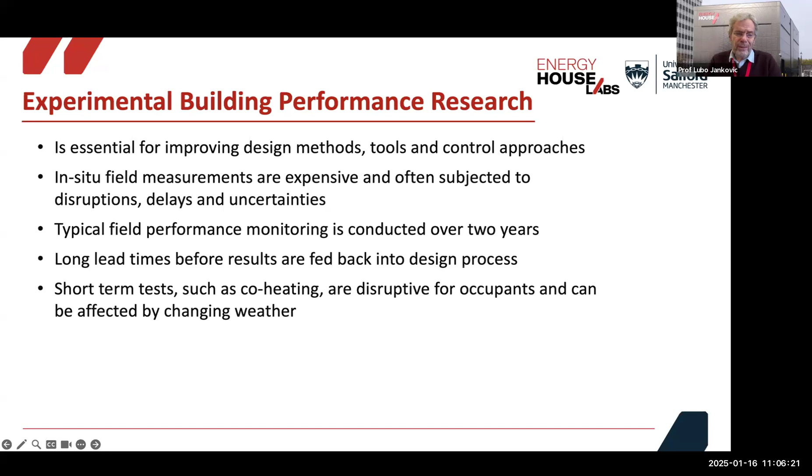In situ field measurements are expensive and often subjected to disruptions, delays, and uncertainties. Typical field performance monitoring is conducted over two years, and this represents a long lead time before results are fed back into the design process. Short-term tests, such as co-heating, are disruptive for occupants and can be affected by changing weather.

Before my tenure at Energy House Labs, I lost count of how many buildings I monitored, probably over 100 buildings as part of field trials. But one project in particular that I'm showing here involved 20 houses in Swindon and 20 houses in Norfolk, and there were various complexities of fabric and systems issues and interactions with the occupants.

For example, air tightness was far worse than design. Heat pumps were not installed correctly and were producing suboptimal results, and people didn't know how to operate them.

In terms of other issues with occupants, we had an occupant switching off a mechanical ventilation with heat recovery system without us knowing about it. There were occupants who didn't know how to switch the heat pumps off. But in one case, an occupant managed to switch off our weather station that happened to be in his garden. So all of this required frequent site visits.

And it is expensive, especially if you think that these sites are probably maybe about 4 hours drive apart, and then a third site is where I live.

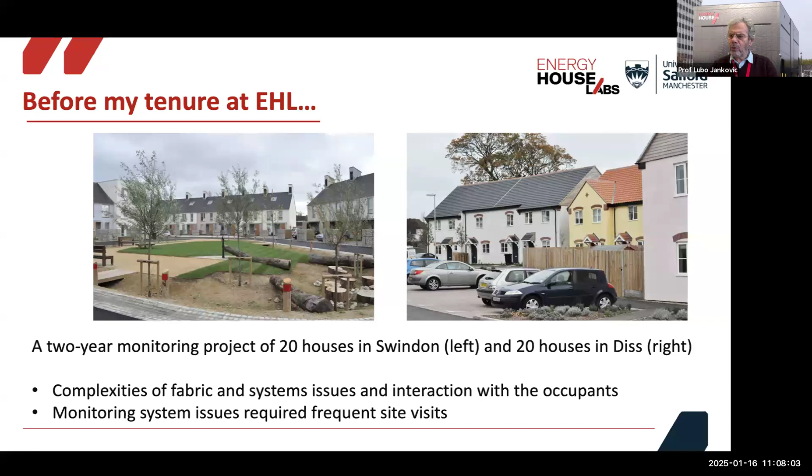In terms of short-term monitoring, such as co-heating tests, these require stable weather over a week or more. I did a co-heating test in this particular house at the BRE site, and this building was given to me to work with in March of that particular year. This co-heating test was likely to be disrupted by sunny weather, and I had to install reflective foil as a precaution to prevent excessive heat gains into the building.

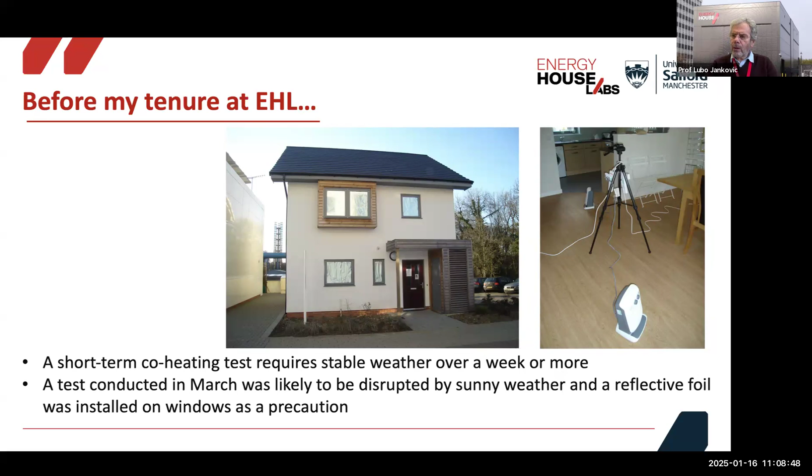So therefore, we need to do something better than field trials, and we are in a race against time to understand and mitigate the effects of global warming.

According to Copernicus Global Climate Highlights, the average global temperature in 2024 was 1.6 degrees Celsius above the pre-industrial level. This is almost breaking news as of a few days ago. And this has breached the Paris Agreement threshold of 1.5 degrees Celsius. And in 2022, the Met Office recorded a new record temperature of 40.3 degrees Celsius in Lincolnshire.

So an accelerated approach towards building performance research is needed to achieve net zero targets by 2050. And such a new approach has been developed at the University of Salford Energy House Labs.

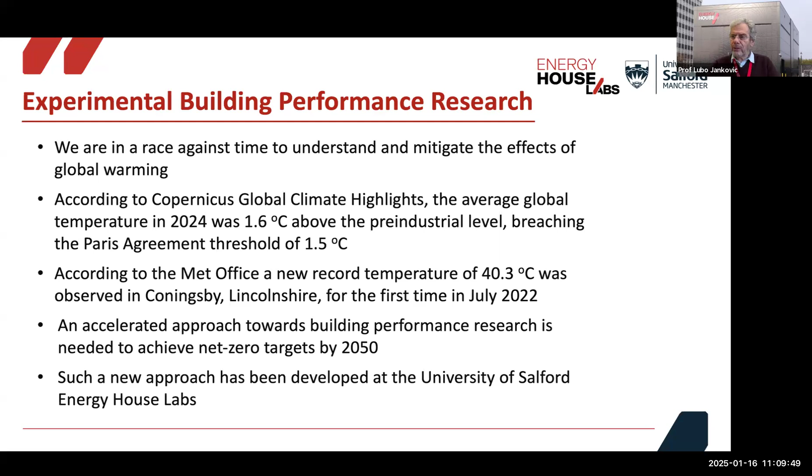So what are Energy House Labs? We have 4 labs plus another one potentially emerging. We have Energy House, which opened in 2012, and then Energy House 2, which opened in 2023, and then Thermal Measurement Laboratory and Smart Meters, Smart Homes Laboratory. And we are just about to establish a modeling lab that actually takes data from all these other labs and generalizes it, scales it up, and adds value to the data.

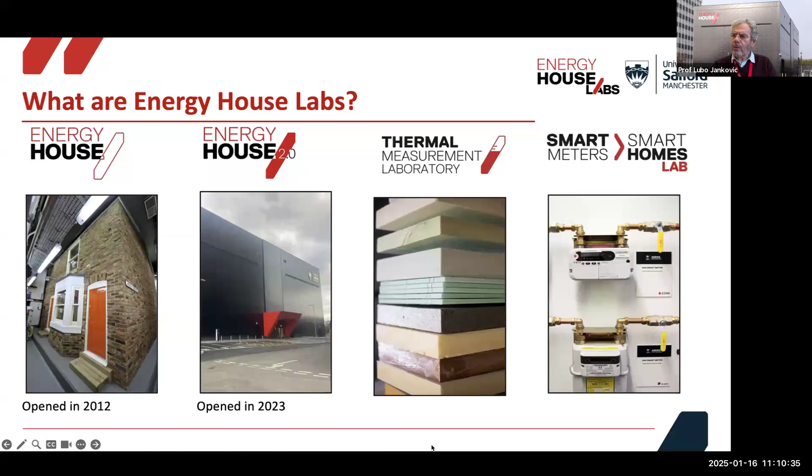Okay, so what is Energy House? According to Climate Change Act of 2008, UK carbon account for the year 2050 has to be at least 100% lower than the 1990 baseline. And existing homes will still be standing, 70% of these will still be standing in 2050.

And retrofit solutions are difficult to assess. Field trials are difficult and expensive, and we need to be able to repeat experiments. And we need to have the ability to change the building, even to build in defects and take more risks.

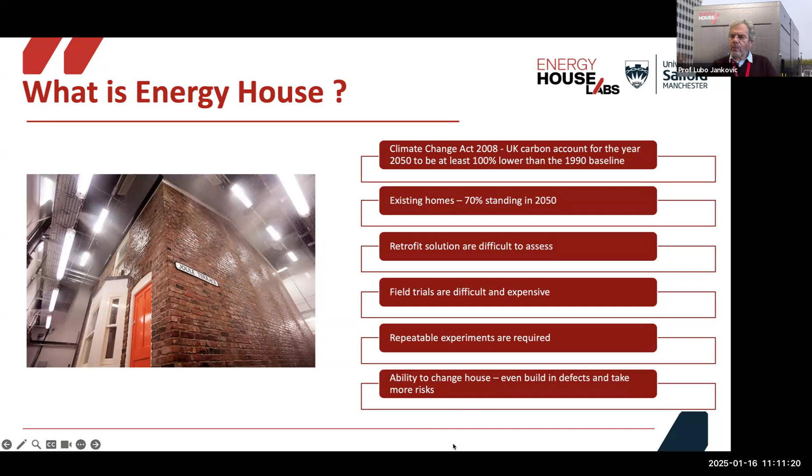So Energy House is a fully furnished, fully instrumented house within a climate chamber. And it is a semi-detached house in a controlled environment. It has high data quality with more than 300 data points, not just to evaluate performance, but the underlying reasons for the performance.

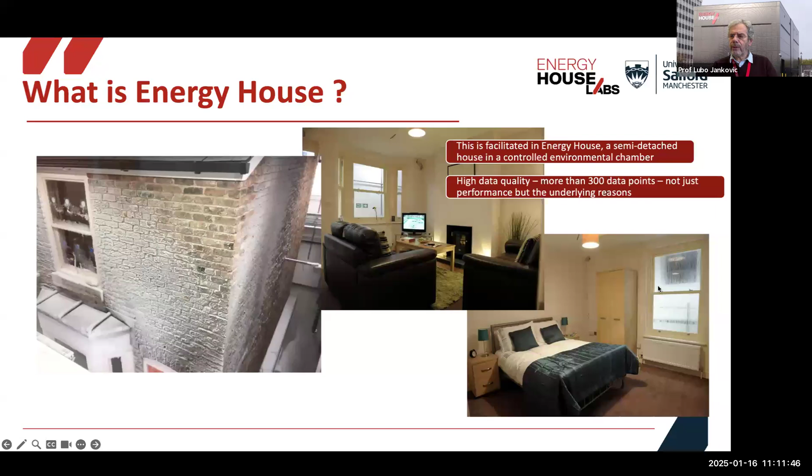And the environmental chamber and the house are summarized here. There are 3 heating systems in Energy House. There's gas, there's air source heat pump and electric heating. Then there's obviously hot water heating.

It's fully furnished. There are appliances there, and it's fully automated. So the doors, windows, bath, shower, lights, and heating are fully automated.

And it is constructed using methods found between 1900 and 1910 in the UK with reclaimed materials, and it is a solid wall construction.

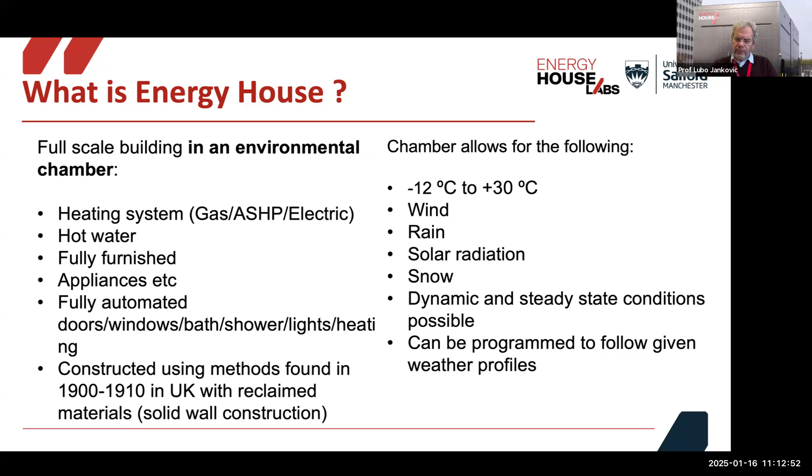The chamber allows for -12 degrees to +30 degrees external temperature, and then there are wind and rain and solar radiation simulations and snow. We can produce dynamic and steady state conditions, and these can be programmed to follow given weather patterns.

So in Energy House, we can conduct full retrofit. We can conduct full retrofit without floor insulation. We can do just solid wall insulation. We can investigate performance of different glazing types, change the loft insulation. We can do acoustic tests, or we can just use it as a reference case.

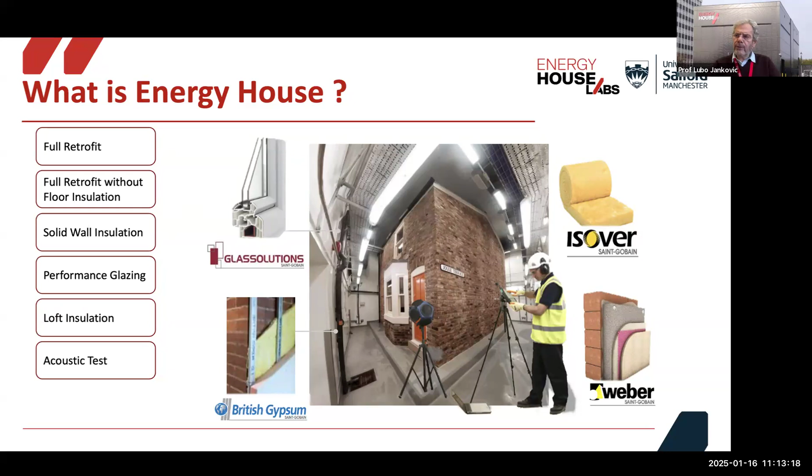Now, I'll give you a few examples of research results achieved over the past 7 years. A small one of 0.6% saving if the central heating boiler is controlled to manage the start time and ramp times of heating, and chopping sections of heating. And if we remove air dissolved in the central heating system, that contributes to a saving of 0.5%.

But if we add a time proportional and integral thermostat, that provides savings of 32%. If that thermostat is integrated with thermostatic radiator valves, that leads to a saving of 53.5%. A voltage optimization system was introduced to change the voltage down to 220 volts, and that improved performance between 3.3 and 3.9%.

Water-filled electric heaters were also tested against gas central heating. Savings are generated because there are no boiler heat losses, no losses to floors through distribution, and there was quicker heating and cooling, with no lag times. The saving was 23.4% annually.

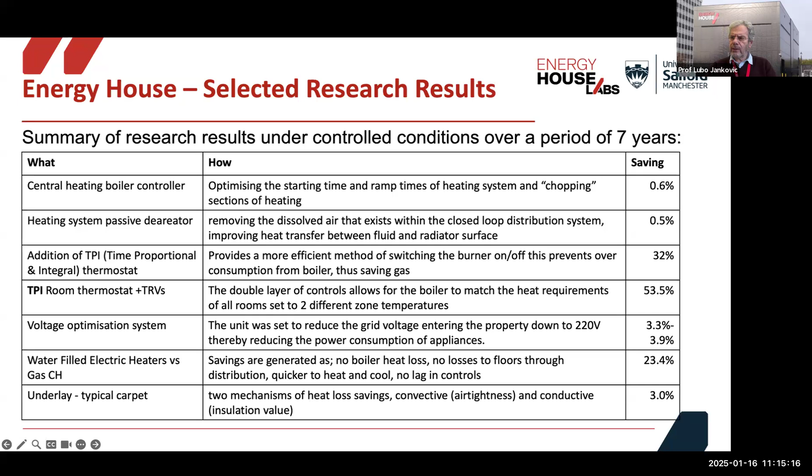And then underlay, typical carpet, saved around 3% of energy. Then installation of a window film on single glazing effectively created double glazing, which improved energy saving by 2.8%. Curtains, when used at night, saved 2.2%.

Suspended timber floor insulation, 7%. Hybrid wall insulation, so external wall insulation was installed to gable and rear walls, and internal wall insulation to the front elevation, the main facade, so that the main facade was kept untouched.

And that created savings of 45%. Loft insulation top-up from 100 to 270 millimeters, 3.8% saving. Window replacement to A triple plus generated 7% of savings, and full fabric retrofit 63%.

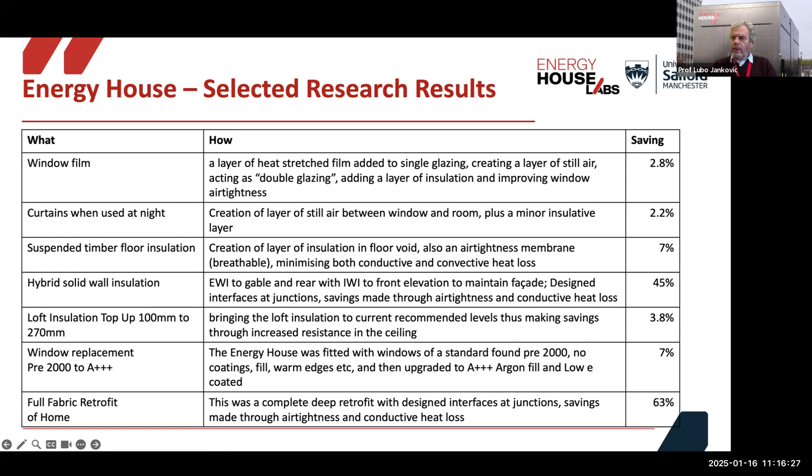Okay, so Energy House is therefore very useful to evaluate all these different performance issues.

We can push it and poke it and see what happens, but this is a fixed asset reflecting 20% of UK housing, with a limited weather profile of between -12 to +30 degrees Celsius. Waiting time in Energy House to do new experiments can sometimes be more than a year, and we've had approaches from other universities. Therefore, Energy House 2 was created as a new facility to retain leadership in this approach.

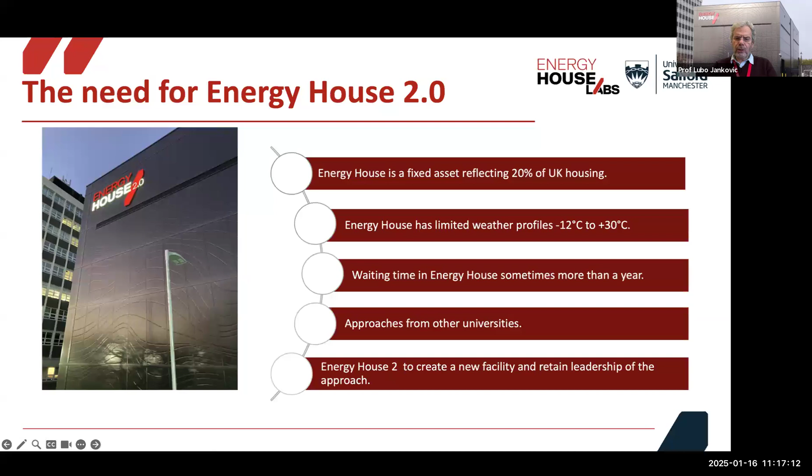Energy House 2 opened in 2023. It has two large climate chambers which can maintain temperatures between -20 to +40 degrees, representing 95% of the populated areas on Earth. There are wind, rain, solar radiation and snow additions - we have a proper alpine grade snow machine, and dynamic and steady state conditions can be programmed. We have vehicle access for bidirectional charging to homes, with PV, ground source heat pump, air source heat pump and hydrogen supplies. We're working with partners in acoustics and social science.

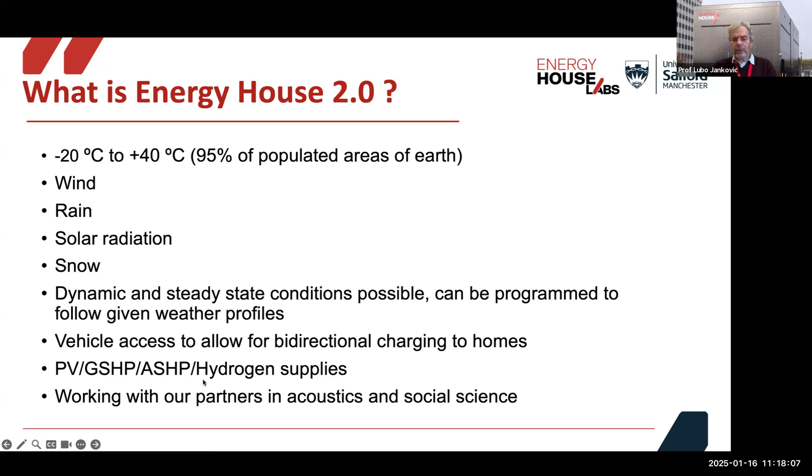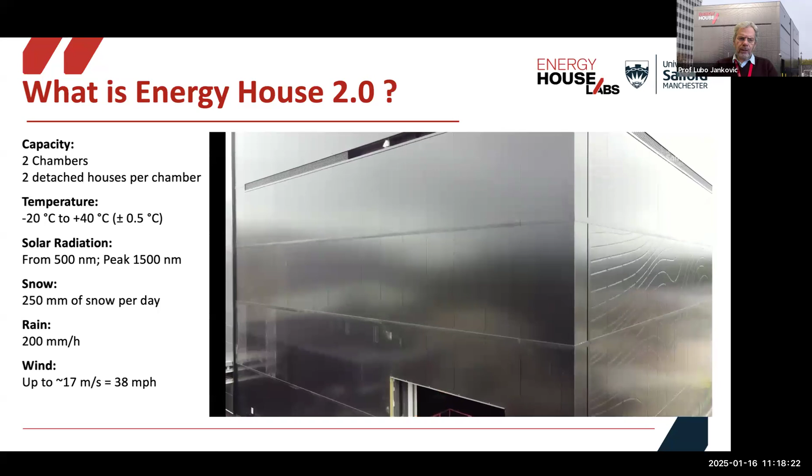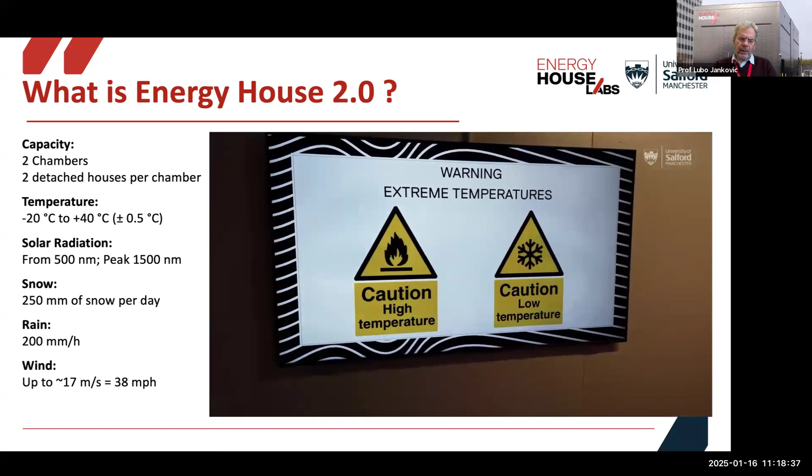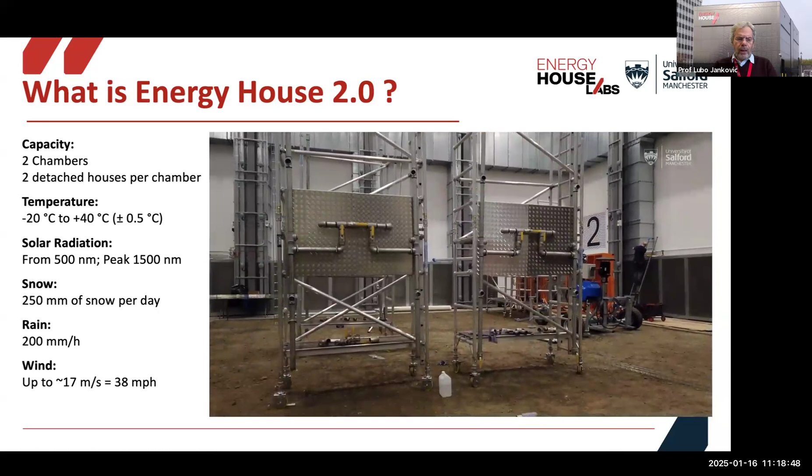I'll run this video to show you how it was developed. There are two chambers, two detached houses can be constructed per chamber, with temperatures of -20 to +40 degrees. Solar radiation starts from 500 nanometers and peaks at 1500 nanometers. We can produce 250 millimeters of snow per day, rain at 200 millimeters per hour, and wind up to 17 meters per second, around 38 miles per hour.

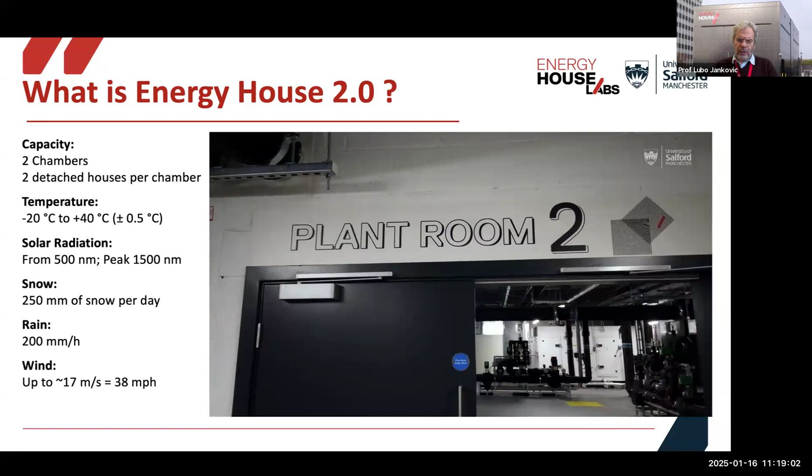These are large plants that service Energy House 2 - heating, ventilating, air conditioning, and cooling plants.

Energy House 2 was constructed, as I said, in 2023.

Now the chambers each contain 1200 millimeters deep soil. There's a pit under each climate chamber, 1200 millimeters deep, filled with soil, isolated by thermal insulation from the ground beneath and surrounding the pit. The walls and ceilings of the chamber are well insulated, providing isolation from the external climate with high levels of air tightness. Both chambers are independently conditioned by large heating, ventilation, and air conditioning systems.

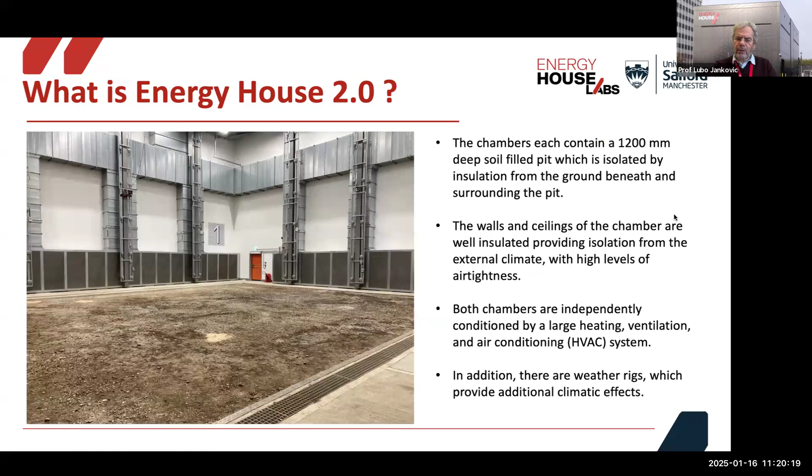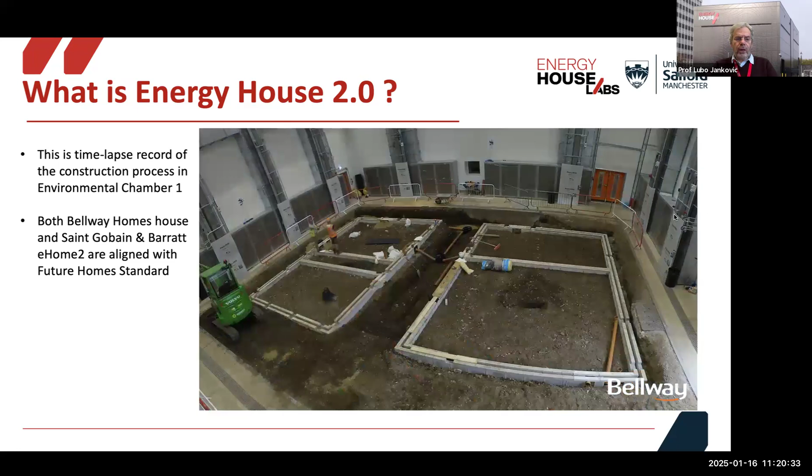In addition, there are weather rigs which provide additional climatic effects. This is the time-lapse record of the construction process in environmental chamber 1, where both the Bellway Homes House and the Saint-Gobain Barratt eHome2 house are constructed, aligned with the Future Homes standard.

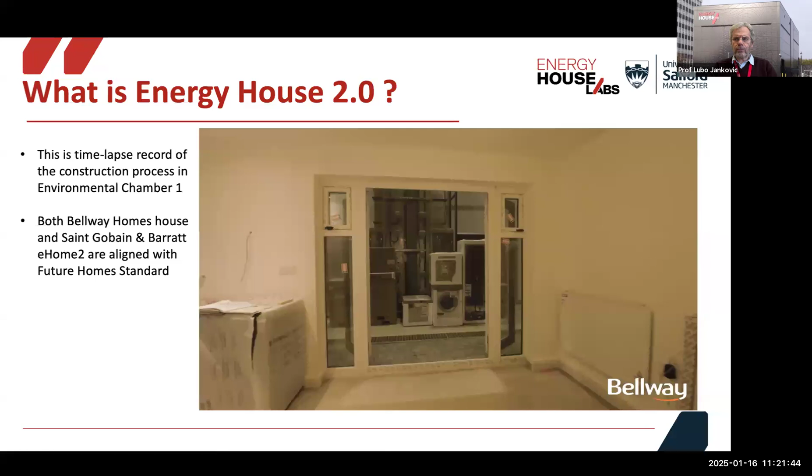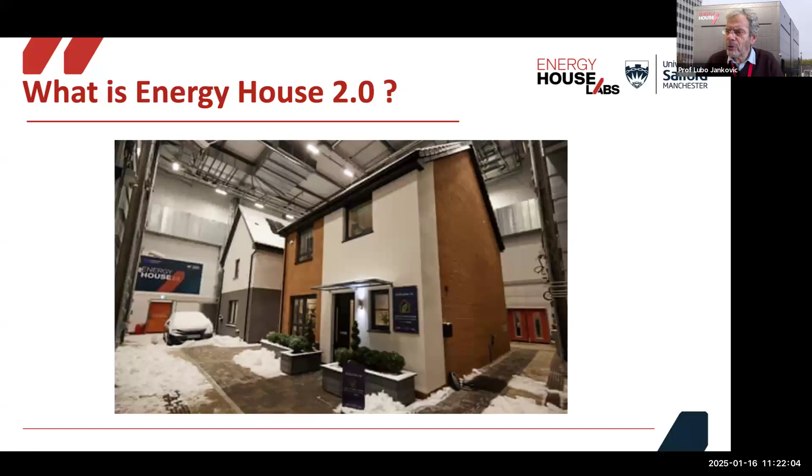Here is a photo of environmental chamber 1 under snow with a car inside. This gives you an example of what is possible to simulate.

Future Home Standard will happen this year, in 2025. It involves a 75% carbon savings reduction compared to 2013. Houses will be zero carbon ready, with efficient, more airtight fabric, and lower running costs. They will have solar PV, batteries, EV chargers, and air source heat pumps. There will be no gas heating.

Energy House 2 has two real homes - the Saint-Gobain Barratt eHome2 and the Bellway Homes House - which are very similar to the Future Homes standard. So these are the houses of the future, effectively.

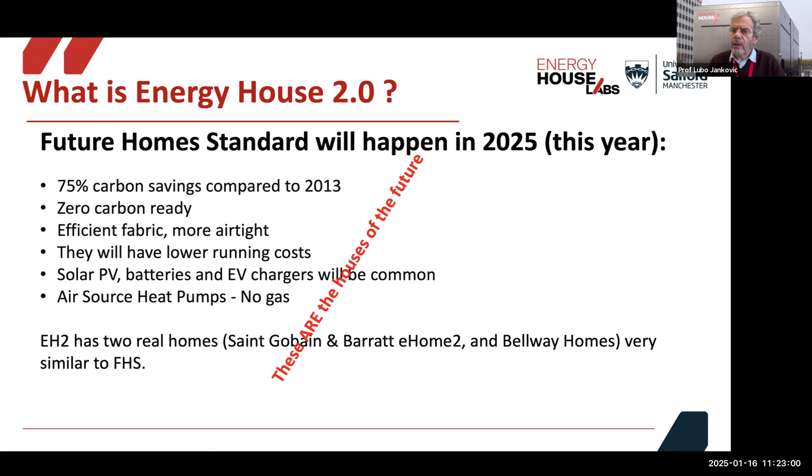The Future Home Bellway has a timber frame construction with infrared panels in the ceilings. There's a PV inverter and a battery in the loft, mechanical extract ventilation, a hydro-top air source heat pump, and mechanical ventilation with heat recovery. There's a wastewater heat recovery system based on a Mira HeatCapture integrated tray, which is 34 to 40% efficient, and a Mira HeatCapture vertical pipe system, which is 58 to 64% efficient.

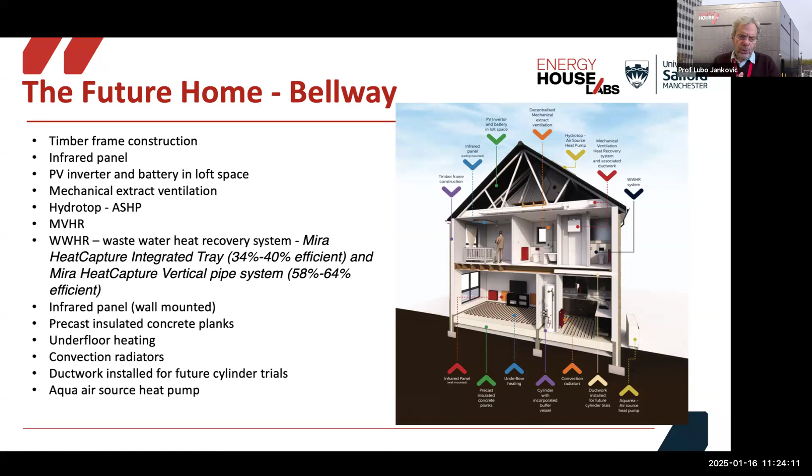There are infrared wall panels, precast insulated concrete planks, underfloor heating, radiators, convection radiators, and ductwork installed for future cylinder trials - not necessarily used immediately, but there for future trials. There's also an aqua air source heat pump.

There are various measurements that we conducted here, such as whole house heat loss measurement. Apologies, my mouse is very sensitive and it just jumps to different slides.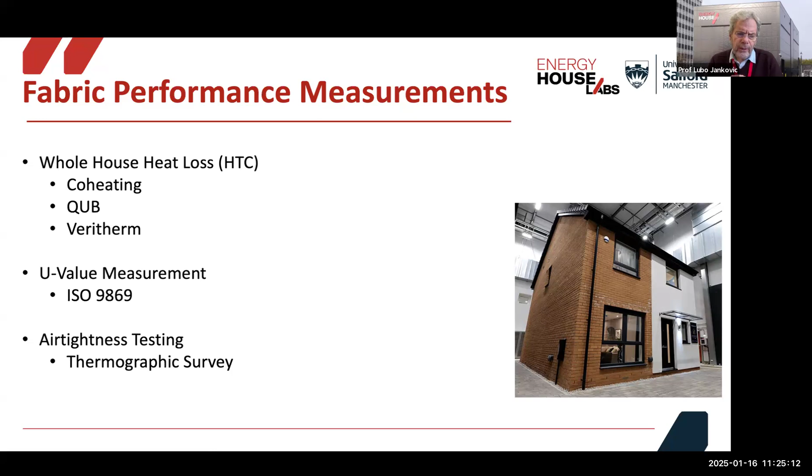Whole house heat loss was measured using the co-heating test, QUB test, and Veritherm test - three different tests. U-values were measured using the ISO 9869 standard, and air tightness testing was measured with a blower door test and also a pulse test. A thermographic survey was conducted during the blower door test.

For co-heating, if we do field trials, we need to account for solar radiation, and that kind of trial takes 2 to 3 weeks. It's a quasi-steady state - you can't achieve true steady state - and this equation is correct for accounting for solar radiation.

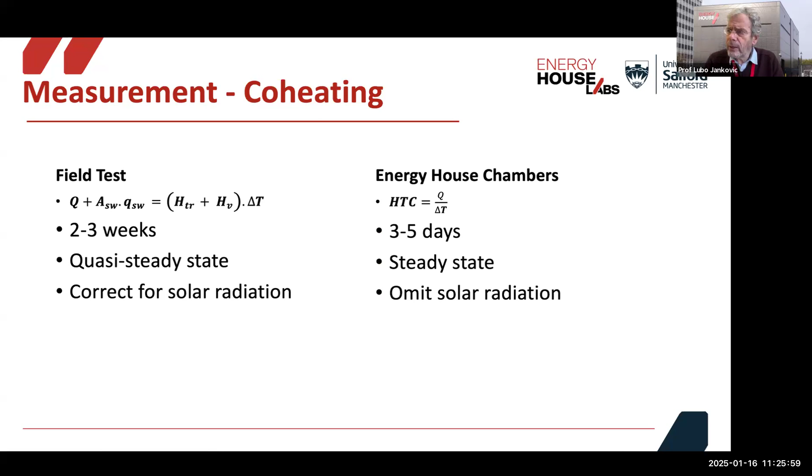But for energy house chambers and labs, the heat transfer coefficient is calculated using a much simplified equation, and takes 3 to 5 days. Its steady state condition is achieved, and solar radiation is omitted. So U values were measured over a period of 3 to 5 days under steady state conditions.

These are the locations, wall locations, where the heat flux plates were mounted, and you can see the numbers corresponding to U values in these particular locations, from 0.12 to 0.19. So when you design a building and say you want the U value to be 0.12, you never know whether this is going to be consistent across the wall, and this is why we measure these things. You can see that there are differences in U value between different points on the wall.

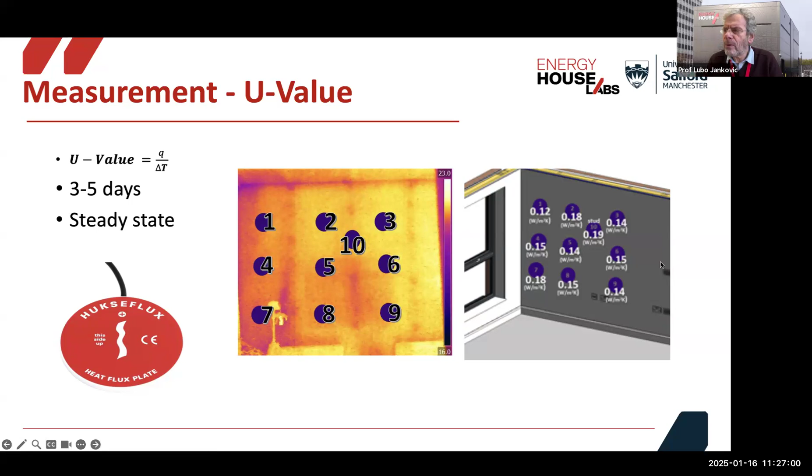Then air tightness was measured using fan pressurization with a pressure difference of 50 pascals. This is a blower door with a very powerful fan, and that allows for a thermographic survey and air leakage detection. I've done these tests many times myself in field trial situations before I joined Energy House Labs.

When you put a building under negative pressure at 50 pascals, that allows air to come into the building, and that is a very good opportunity to go with a thermal camera and see where you have air leakage. In many cases, I found air leakage from unexpected places, such as electricity sockets, for example.

Now, the pulse test achieves a pressure difference of 4 pascals, and this is quite similar to natural ventilation pressures such as wind effect and stack effect, and these are rapid tests.

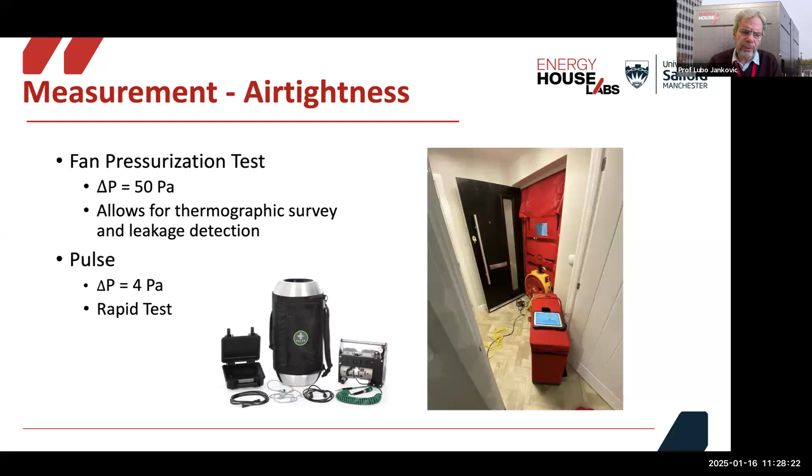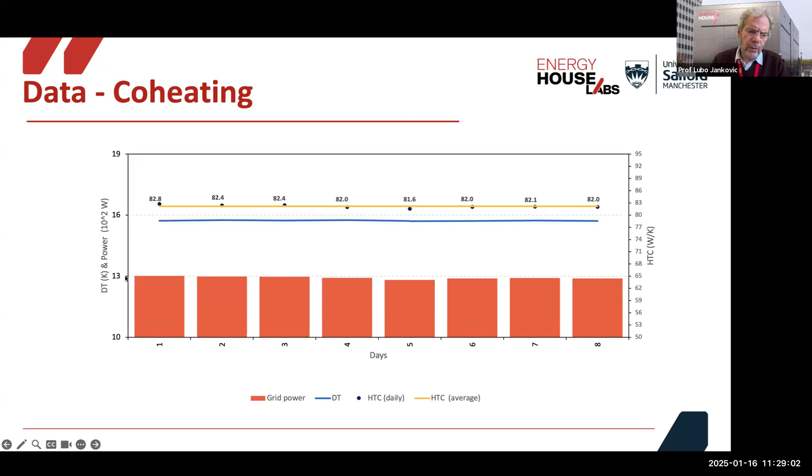Okay, so co-heating tests produced these results. This is the heat transfer coefficient, which was on this scale between 82.8 and 82, and the design was just under 80. The grid power is shown in orange here, at 1.3 kilowatts.

Now, the results here of the heat transfer coefficient using 3 different tests - co-heating, QUB, and Veritherm - are shown here between 76.5 and 85.6 watts per Kelvin.

And you can see results of the air tightness here. With the blower door test, air permeability was 4 cubic meters per hour per square meter. With the pulse test, it was 3.25, but the design was 2.5. So the building was really underperforming in terms of air tightness.

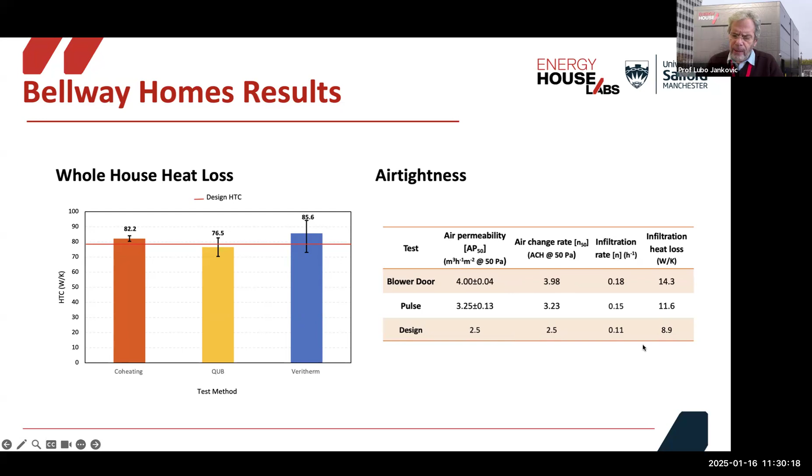Then the air change rate was almost 4 under the blower door test, 3.23 under the pulse test, and then we had corresponding heat losses here. U values were also measured, and for doors and windows we had to take the U values as provided by the manufacturers, but for the fabric, we measured our own U values, and there were differences between design and build.

15.82 as designed for external walls with a 25 millimeter service zone, and 14.93 for the as-built situation - these are heat losses. U values were 0.18 for design and 0.17 for the as-built situation.

And in other walls where there was a 38 millimeter service zone, 0.18 U value as designed, and 0.17 as built.

Rendered walls were quite similar between design and build, and the ceiling was quite different because the insulation in the as-built situation was disturbed by the contractors, and it was much worse - 6.5 heat loss compared to 4.18 watts per Kelvin. Design U value was 0.09 for the ceiling, but 0.14 for as-built.

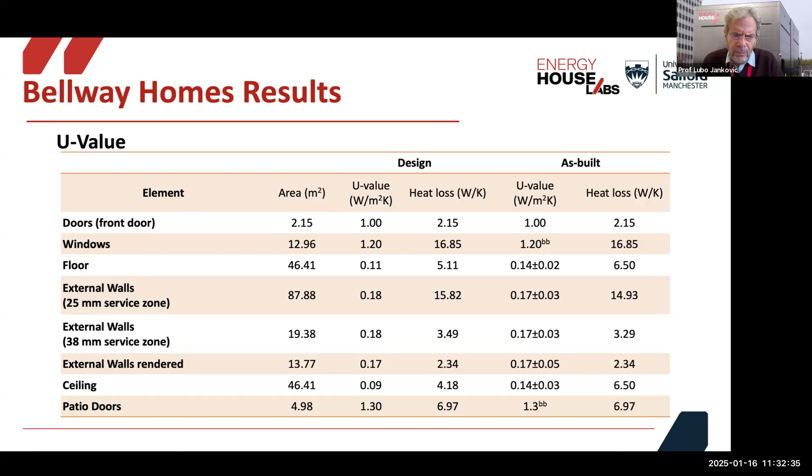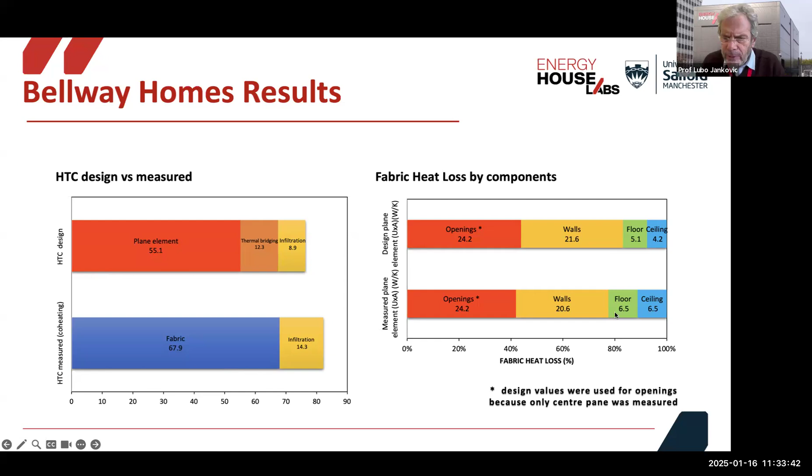So that is just over 80, but design was under 80. Heat loss by components: openings were exactly the same as designed because manufacturer values were used, since only the center pane could be measured. Walls designed were 21.6, but measured 20.6. Floor was 5.1 and ceiling 4.2 for the design situation, and floor and ceiling for as-built was 6.5.

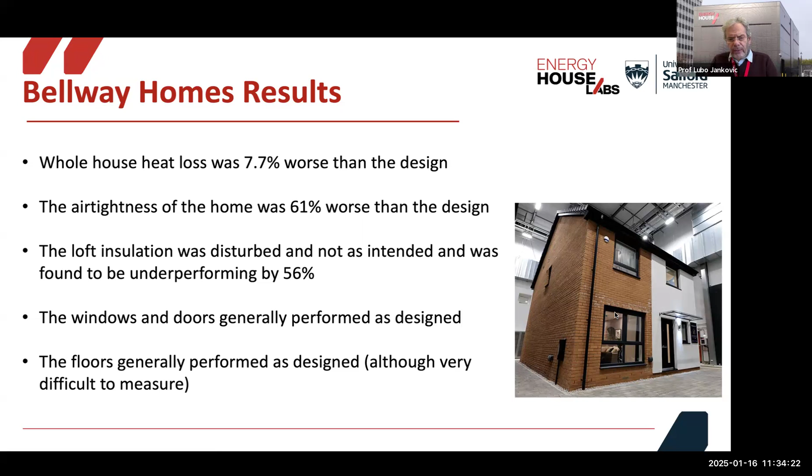So the whole house heat loss was therefore 7.7% worse than the design. The air tightness of the home was 61% worse than design. The loft insulation was disturbed, as I said, by the site operators, and was not as intended, so it was underperforming by 56%. The windows and doors generally performed as designed, and the floors generally performed as designed, although this was very difficult to measure.

So overall, the Bellway home performed well. Air tightness could have been improved. Remember, design was 2.5 and as built was 4. So the house builders must stick with these houses for the rest of the work. And this is not just in this particular case.

I mentioned earlier that I monitored a large number of houses in field trials. This pretty much corresponds to my experience, where air tightness is typically lower.

I was carrying out air tightness tests in a newly constructed estate of houses, and as I was coming in with my gear, my fan and blower door and all that, a site operator was coming out with a mastic gun saying to me, 'I've made it ready for you, mate.' And I went in and found a hole in the window frame, so I had to call him back to fix that before I could do the air tightness test.

So these are the kinds of things, the level of detail that needs to be paid attention to, to actually get houses airtight and performing to design specification.

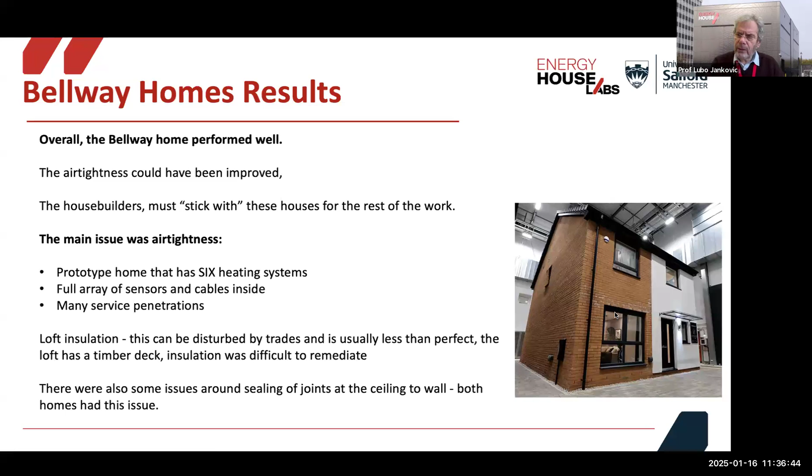But in general, it was reasonably good performance. We measured actual performance of the building under controlled conditions in the chamber, and we examined the air tightness, the efficiency of the elements at retaining heat, air leakage paths using thermal imaging, and how efficient the house was at retaining heat. So both houses in the chamber performed well in terms of how they lost heat.

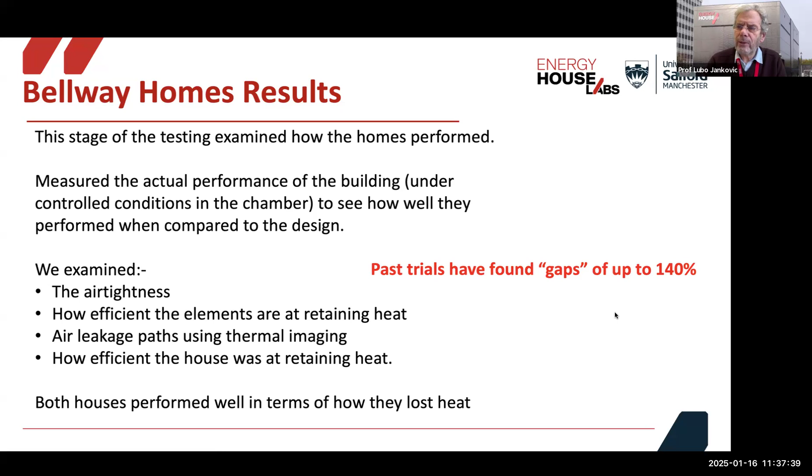Past trials have actually found gaps of up to 140% discrepancy between measured and designed values. According to the database at Leeds Beckett University, this is the co-heating database for new build homes. Dwelling number 23 had a gap of 140%. And if you look at all these different dwellings, they had quite considerable gaps.

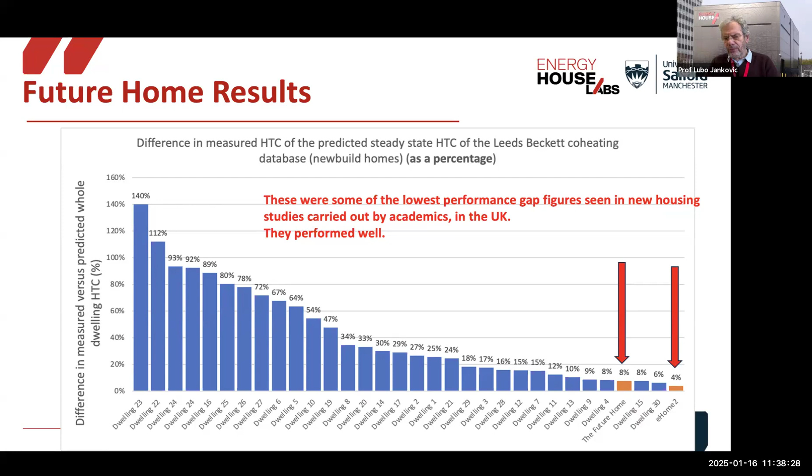But this is the future home, the Bellway house in our Energy House lab. 8% is the gap, which is actually 7.7 but rounded up to 8. But eHome 2, which is also in the same climate chamber, was even better, 4% gap between design and as-built.

We also do testing of heat pumps for domestic hot water delivery, and thermocouple sensors are installed at tap outlets. So this is in the kitchen, this is the bathtub tap, and this is the bathroom sink tap.

And these are two heat pumps that we tested. One was Vaillant, one was Curve. Vaillant was actually delivering heating to the whole house, but also had a domestic hot water heating function, whereas the Curve heat pump was just for hot water heating.

We used large tapping profiles according to a British standard. This large tapping profile was a worst case scenario. So for every hour of the day, we had to draw a certain volume of hot water and a certain amount of energy. Tests were conducted in a series of 72 hours under climate conditions of 5 degrees, 7 degrees, and 14 degrees.

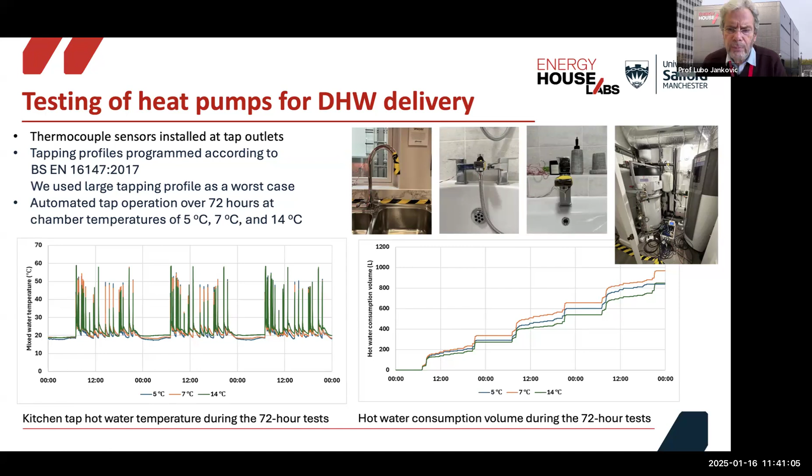And so these are the hot water temperatures delivered under 3 different tests, and this is hot water consumption volume during the 72-hour tests. We found that these heat pumps can actually deliver the required amount of hot water according to the British standard.

We also do computer modeling and optimization, and the aim of this study was to address discrepancies between design and as-built values of a new build future home standard house in climate chamber 1. So this is the Bellway house. We investigated design optimization, focused on envelope U values, walls, loft, windows, French doors, air permeability, and also heating set points for living and other zones.

Now, how did we do that? We took measured values for external walls, loft and ceiling, and various other parameters, and these are shown in bold. Then we went below and above these as a kind of guess situation - would performance have been better if the U value was 0.16 rather than 0.17, and so on.

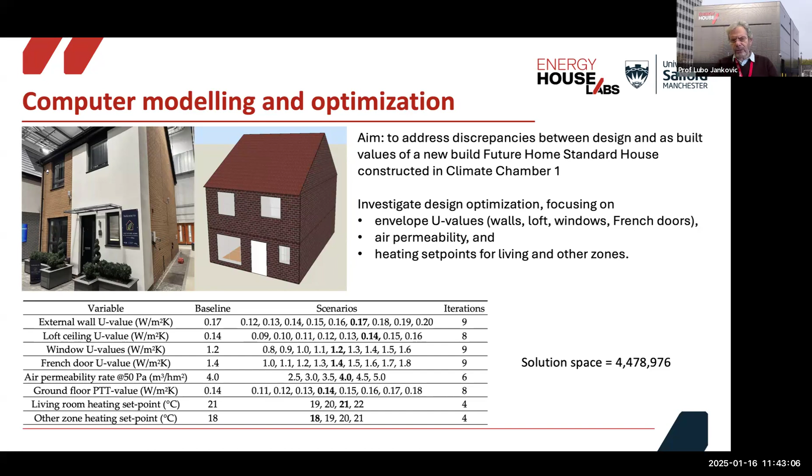And we put all of this into the multi-objective optimization engine of the simulation tool. And when we count all these different scenarios—9 here, 8 here, and so on—we tested different set point temperatures and found that the total solution space was just under 4.5 million possibilities. That then goes into a simulation that takes several hours, and then we get back the results.

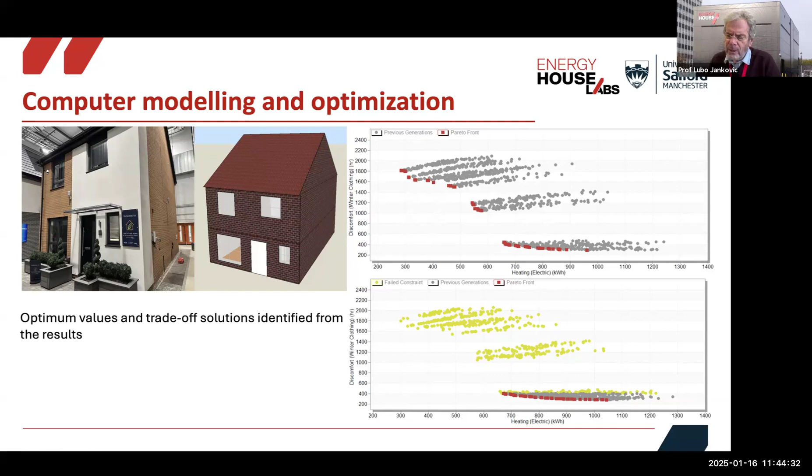We also have been looking into measurement of building physics properties, and you've seen measurements of heat transfer coefficient, but I personally have been doing this in a slightly different way. I've been running a calibrated simulation model of the building from climate chamber 1, heating it up to something like 45 degrees in the model and letting it cool down, and finding out the time constant, which enables me to calculate heat transfer coefficient.

Time constant is the time it takes the building to go through 63% of the change from starting the heating to achieving the endpoint, achieving equilibrium. For both heating and cooling, the time constant is the same. So if the time constant is the same, and time constant is effectively capacitance divided by heat transfer coefficient, then heat transfer coefficient has to be a variable.

You can see here that heat transfer coefficient starts from something like almost 1000 watts per Kelvin, and goes down to the measured value measured by the co-heating test.

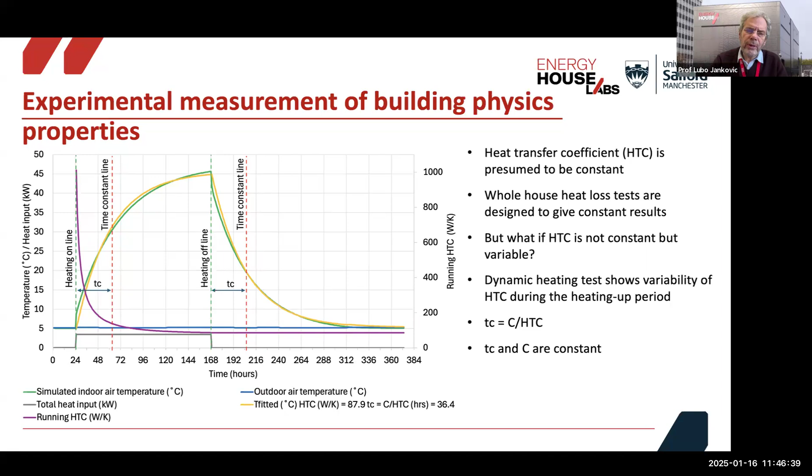So we're looking into this and trying to find out what actually makes the heat transfer coefficient variable, or what is the causal relationship between heat transfer coefficient and its variability.

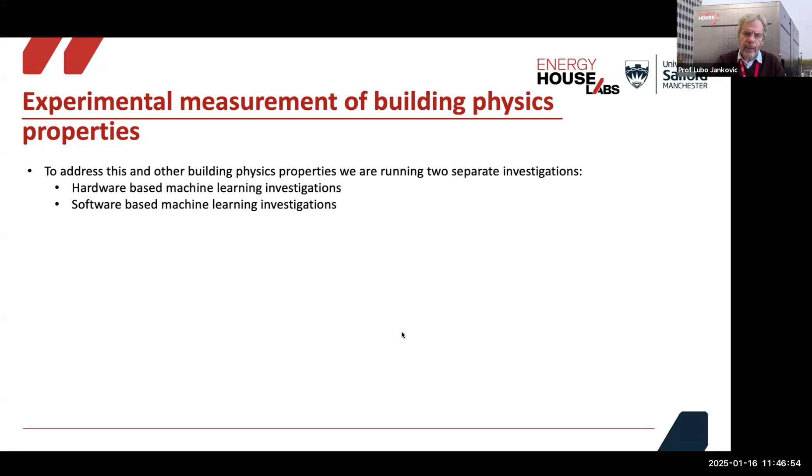To address this and other building physics properties, we are running two separate investigations: hardware-based machine learning and software-based machine learning. The hardware-based approach uses this gadget which I developed, now installed in one of the buildings—in a conservatory in climate chamber 2.

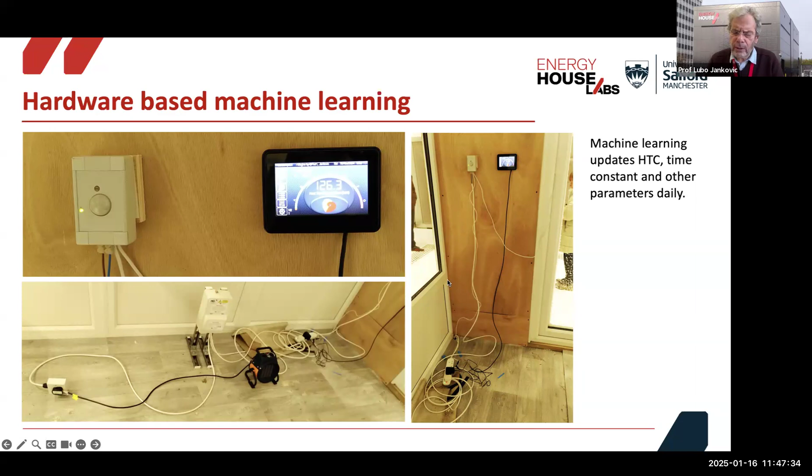This shows you the heat transfer coefficient of the conservatory. This is a sensor that measures daylight, movement and temperature, and another sensor like that is outside, and then a heater is operated by this control device to maintain temperature and calculate heat transfer coefficient.

We also do software-based machine learning. So this house in chamber 2, called the vector house, we take data from that, and using this bespoke in-house developed model of a genetic algorithm, we start by assessing how close the predicted value is to the measured value using random numbers. Then we reduce the randomness by checking the errors of these random numbers and crossing them over, just like in genetics, and also mutating them. Then we get different heat transfer coefficients calculated daily.

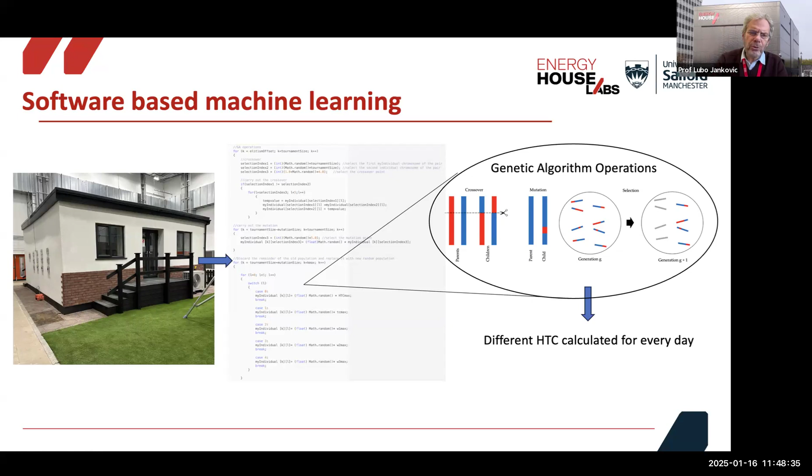So this is work in progress, and there'll be more to report about that in the future. Future research will be based on ongoing analysis of heat pumps to deliver domestic hot water, and there'll be physical experiments with heating up and cooling down of houses.

There'll be measurement of heat transfer coefficient, time constant, and effective thermal capacitance, determination of effective solar apertures under artificial sun irradiation, overheating analysis and mitigation measures, ongoing measurements of the heat transfer coefficients for control purposes, and scaling up of the value of experiments using computer modeling and simulation.

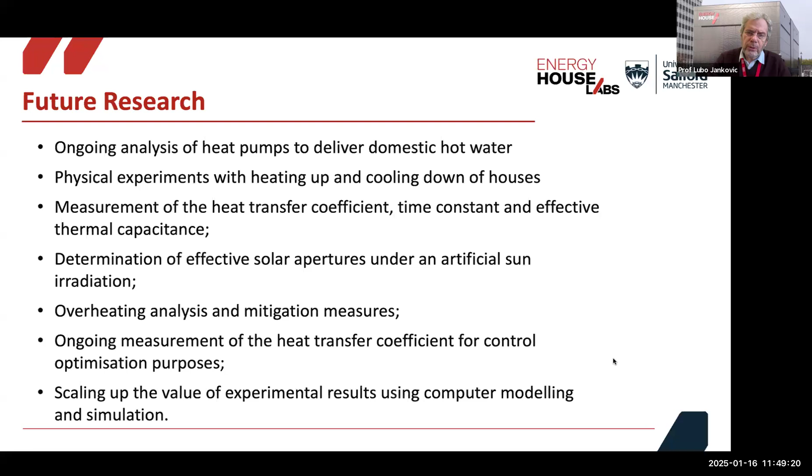So to conclude, experimental building research is a prerequisite for improving energy performance and achieving net zero, and field trials are expensive and often subjected to disruptions, delays, and uncertainties regarding the achievement of net zero targets. Climate chambers at Energy House Labs provide controlled conditions that reduce the time and cost of field trials and increase the accuracy of the results.

For example, instead of running 2-year field trials, we could do the same in 2 to 3 weeks and achieve results that are representative of field trials.

So the research at Energy House Labs contributes towards the achievement of net zero targets in a timelier manner and with more certainty.